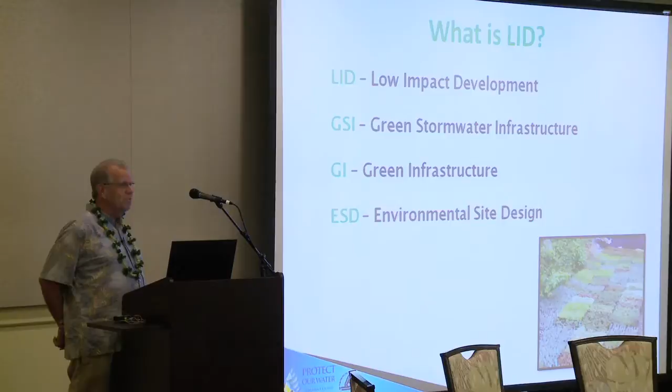If people have questions while I'm going through my presentation, don't hesitate to raise your hand and I'll try to answer them. What is LID? The initials of it are low impact development, but it goes by a lot of different names - green stormwater infrastructure, green infrastructure, environmental site design. It's all lumped together under one general topic of low impact development, LIDs.

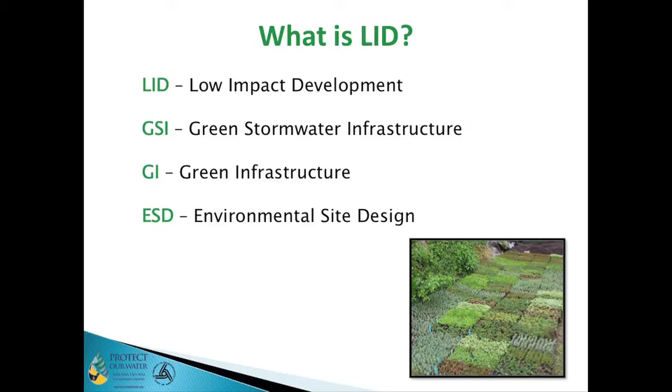Really LID is comprehensive land planning and engineering to kind of take things back or keep things at pre-development levels. In the urban setting, you've got more impervious area, you're going to have more runoff, you change the hydrologic cycle, and the whole concept is to control that runoff and keep it at pre-development levels.

Control it at its source, incorporating infiltration, retention, biofiltration. All of those concepts are to return it to the groundwater, to filter out undesirable materials, sediment, debris, what have you. The biofiltration uses vegetation to really clean up that runoff that's generated.

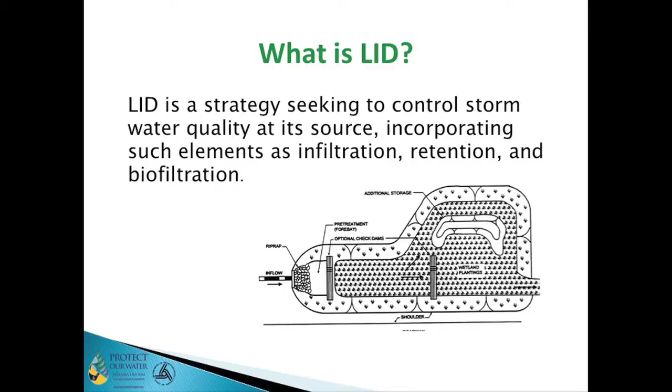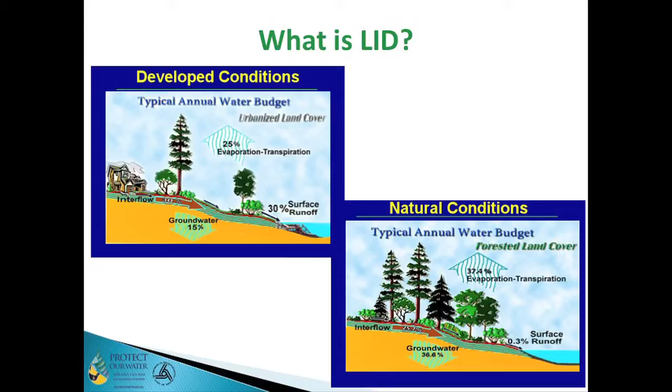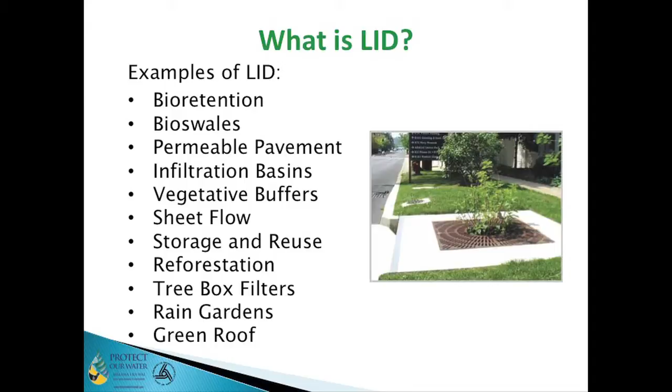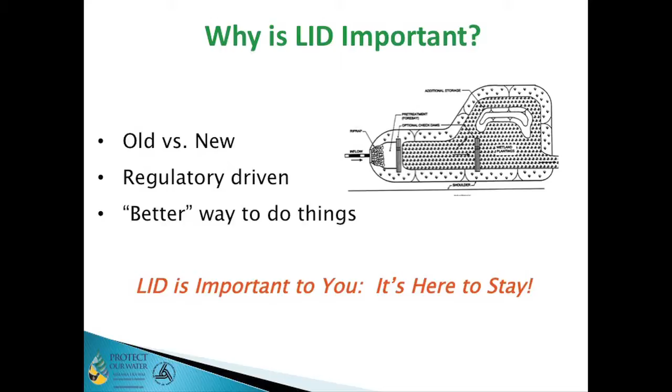Most of it is generally regulatory driven, but with LID it's a better way of doing things, it's a more natural way of doing things. It's not hard engineering - you're not out there building retention basins with overflow weirs and what have you. It's soft, soft green engineering activities.

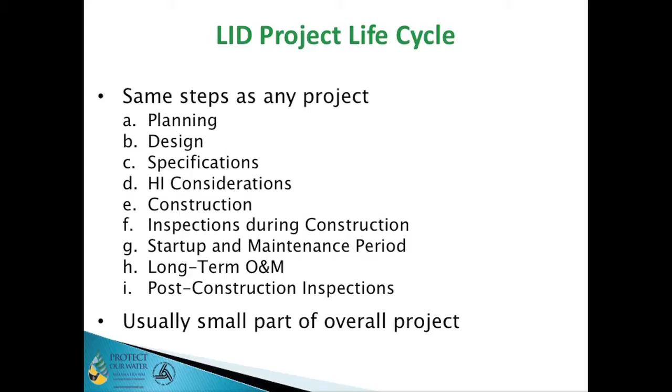Planning, I call that a three-step process. You've got to look out where you're going to do this, lay out the site, and plan for what it is. Select your LID practice - is it going to be bioswales? Is it going to be bioretention? Or one of the other aspects of LID.

Bioswales work real good. They're actually kind of like speed bumps. They work. You can use them in your ditch areas or grass waterways and so forth.

They're very, very effective. The next part in step 2 is to check on the runoff reduction, because that's the whole thing you want to do here. When you've got impervious areas, you're going to have increased runoff. You want to control that runoff, so where's it go? How effective is your particular LID at reducing that runoff amount? And then based on that, what is the size that you need to design for?

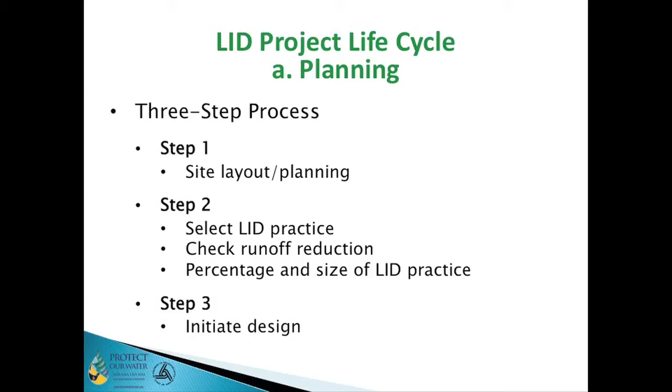There's a lot of information out there. If you do a Google search on the letters LID, you get a lot of good information from municipalities all over the country. There's a LID center on the East Coast that's been in business. I think Neil Weinstein from the LID center was here and spoke on this last year, Richard, wasn't it? But there's just a lot of good information on design procedures, hydrology considerations, and so forth. And then you initiate the design.

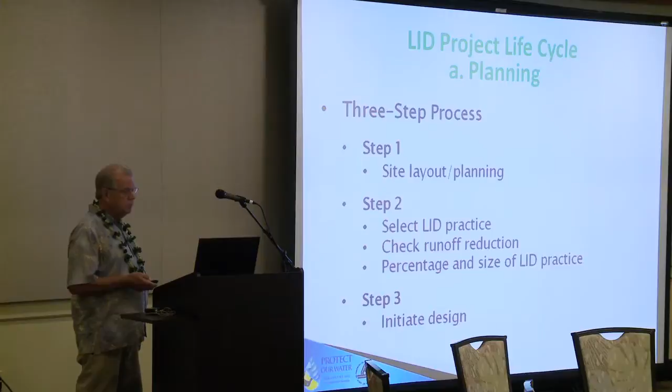The design you get into, you want to really achieve multiple objectives. If there's natural features and resources, you want to preserve those. You want to take those into account of what you're doing, what you're trying to plan around, and so forth.

One of the big considerations for LID, because of the infiltration consideration, is you want to minimize soil compaction through your design and ultimately into your construction. And keep that stormwater close to where it fell on the ground, on the land surface. You don't want to pick it up at the end of the pipe or something like that. It's much more effective to do it right there where it falls.

And the last one is to reduce and disconnect impervious areas. You don't want to have large areas of impervious material. That increases the runoff - it's more that you got to contend with. Have smaller zones of that and what have you.

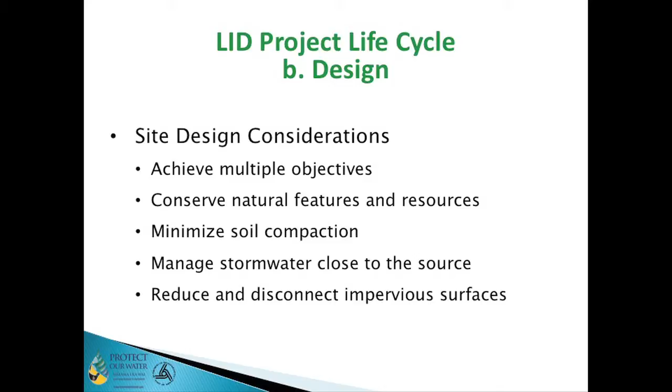Some specifications - I pulled these out of the Hawaii DOT, and I'm pretty sure this would be a pretty encompassing list of what specifications generally would apply. I've been involved with, there's different formats of specifications. Departments of Transportation usually use an AASHTO format of specifications, and this Division 100, 200 series follows that.

There's other specifications, the Construction Specification Institute CSI format. They have some of the similar sections of specifications. For the most part, these specifications can be utilized generally as is, or maybe some general information provided for what the scope of the project is, or the project summary section, the earthwork. There might just be some minor language, but you can follow the general format of those specifications.

I've been involved in projects across the country where we've utilized the highway specifications for LID construction, quite successfully. So there's the general provisions. There's always going to be earthwork, miscellaneous construction, and the materials section, because the materials section includes both granular base material, as well as for filtration, as well as the planning section.

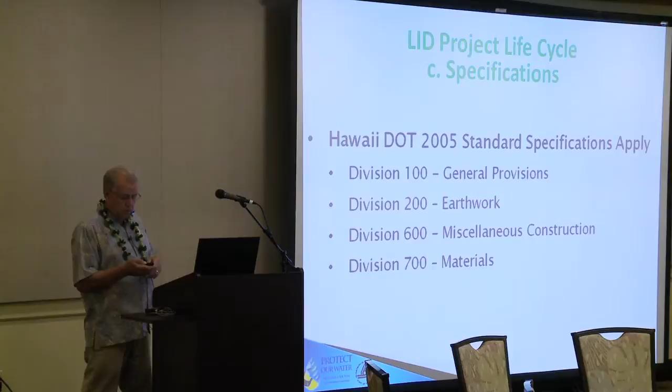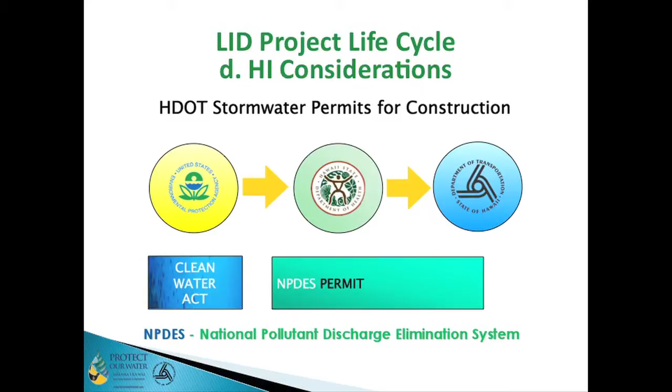Also getting into the Hawaii considerations with the stormwater permits for construction - it depends on the size of that particular LID. It may or may not apply, but it may at least apply under the general permit considerations. There's construction stormwater permits, the notice of intent, a SWPPP that's necessary, BMP installation, and so forth. Inspections and monitoring during the time that you're constructing that.

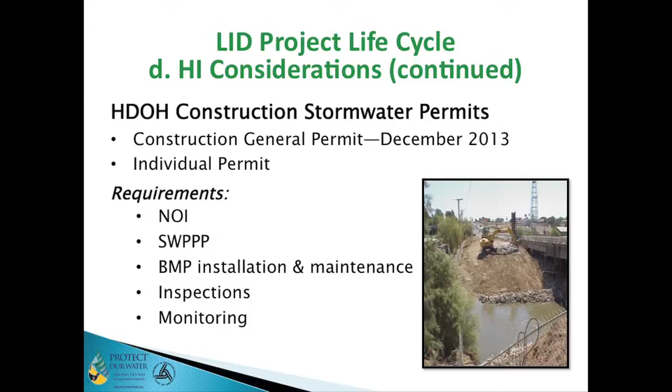The actual construction - you want to figure out where's the LID going to go, and lay it out. You want to identify and locate any BMPs that would be associated with it. Again, limiting the traffic over the LID is important. You don't want to be compacting that soil. You want it so that you can get percolation and infiltration when the LID is constructed.

Use the low ground pressure track - this means the wider tracked excavating equipment. You may have to use long reach excavators in some cases, which is just a special case of the low pressure equipment. And scarify or rip the bottom to increase the ability to infiltrate.

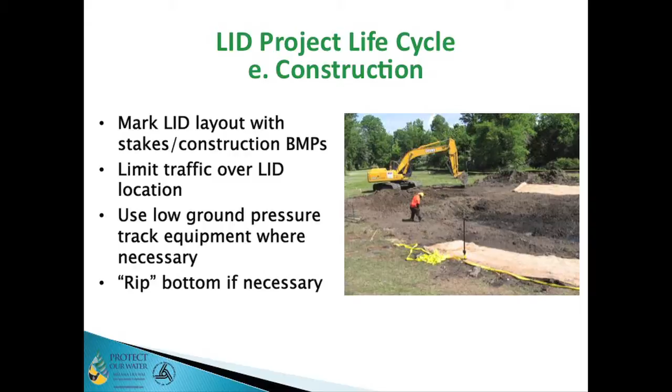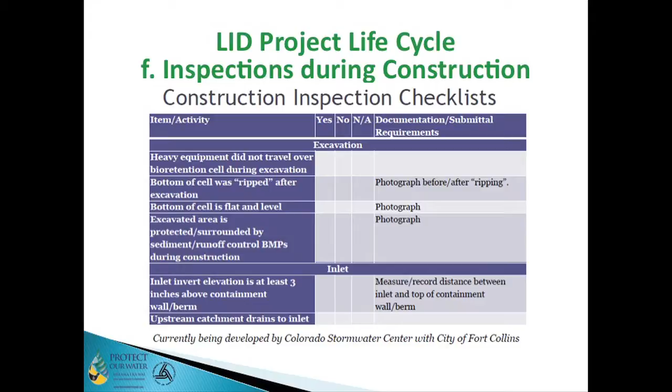Startup and maintenance. Chances are, during the time or shortly thereafter, you're going to get a rainfall event, and likely you're going to get sediment, trash, other debris that will wash into your LID. That's things you've got to deal with - you've got to provide maintenance for that, remove it, get it out of there. And as a part of your design, you would probably have some type of screen or something to accumulate that.

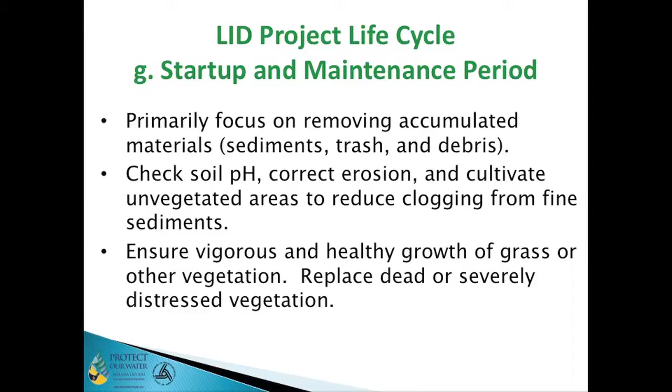The soil pH is necessary to look at for the establishment of vegetation. You want to make sure that unvegetated areas can be cultivated and replanted if necessary, because vegetation is a key to these LIDs. And like the last one there, ensure that there is vigorous and healthy growth of grass or other vegetation that is a part of the LID process.

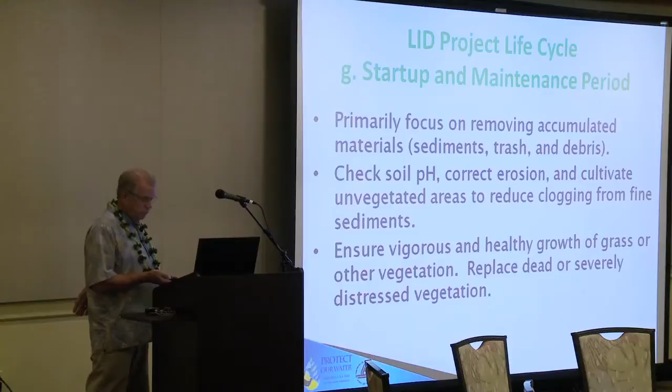Long term, that same consideration - you want to look at, you've got to deal with the sediment, trash, and debris. That is probably the biggest complaint on having LIDs in the long-term sense, because they do collect sediment, they collect trash and what have you. But at least, all of these are part of your overall general stormwater management process. You've got that as a problem anyway. And in some cases, it does become a more concentrated or identifiable area to collect them.

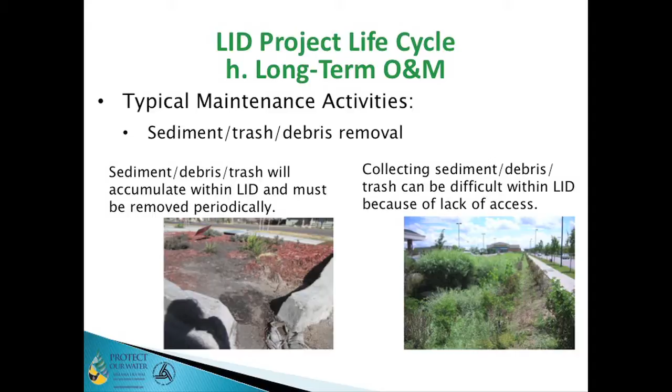But it does take maintenance to remove that material. Sediment, debris, and trash that will accumulate, you've got to remove it for the system to continue to be effective. One of the problems, if you're building these, either along the road right-of-way or in a little bit more remote or limited access areas, it can be difficult to get to them. But that's one of those things you need to kind of plan on up front and in the planning process to incorporate in your design.

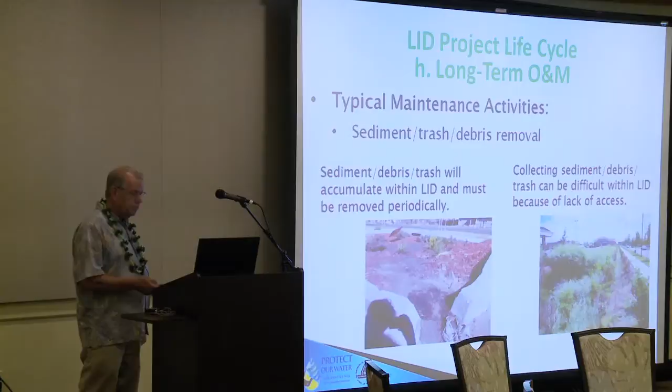Some of the maintenance problems that can occur with LIDs generally go back to they're not performed frequently enough. You let it get up to a state where you've got a problem. It's filled up with sediment. If it's filled with sediment, it's not going to retain any water, it's not going to allow infiltration, and so forth - it just plain isn't going to work. All you've got is an ugly spot out there in the countryside or along the roadway or in a parking lot, what have you.

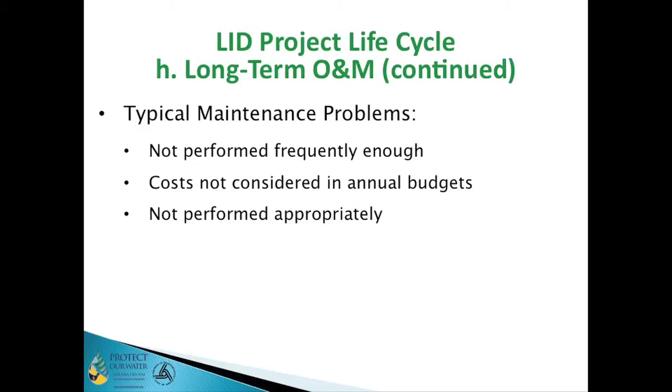Costs need to be considered in annual budgets. This is a hard one because, while LIDs may sound new, they've been around 15 years for sure - I know personally I've been involved with them for 15 years. But the costs are just kind of starting to come together. I've seen costs going back 10 years ago starting to get some costs developed. We know what standard cost for like excavation and reseeding and things like that could be from experience. But there's a lot of information, again, by doing a Google search of entities that are doing this.

With the U.S., LIDs are applied everywhere. On the mainland, I don't think there's a state that hasn't applied them. They're doing them in Alaska - I've had personal experience with using LIDs in Alaska, which gets a little bit interesting with the permafrost considerations and so forth. Here on the islands, this is actually probably a location with the ability to promote the growth of vegetation that is very good. So there's a lot of information, a lot of experience out there, and if you're starting out and looking for something to get a handle on what it could cost to maintain these, you can find that information.

And last, it just wasn't done right. I really don't know what that problem could be, because unless you get into recompacting the soils or doing something like that - if you just go back to what the original plan was for the construction of it, and that's what you maintain back to, you should be able to achieve it.

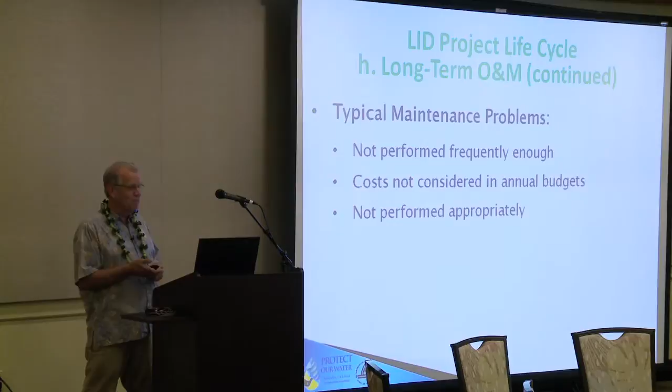Some of the post-construction considerations - again it goes back to that you want to have certain routine inspections, periodic, that are done just to make sure everything's good. Are you getting accumulation of trash, a lot of sediment, what have you? Is it looking nice? Because that's a key aspect of it. It can be a very aesthetic system if it's operated correctly. It could also look pretty trashy and junky if you don't, and select the wrong type of vegetation and so forth.

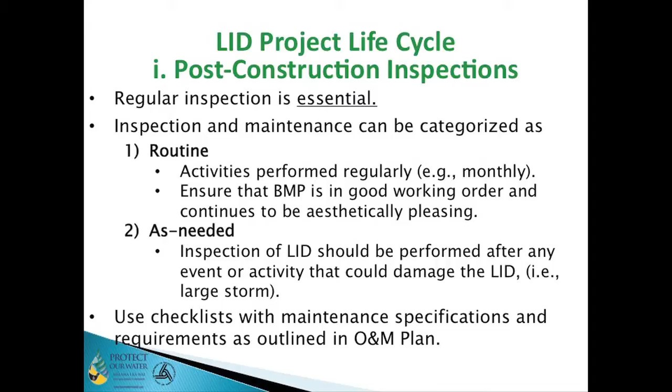Then you get into the as-needed maintenance. If you get a major stormwater or runoff event, these systems are not designed for the 25, 50, 100 year, or I don't even want to think a 500-year event, because they probably won't survive. And that's okay, because they're not intended to do that. They're not a flood control project, they're a stormwater project. They're for those more routine runoff events to control sediment and debris and promote infiltration. But when you have that large runoff event, they need to be inspected and any appropriate maintenance done at that time.

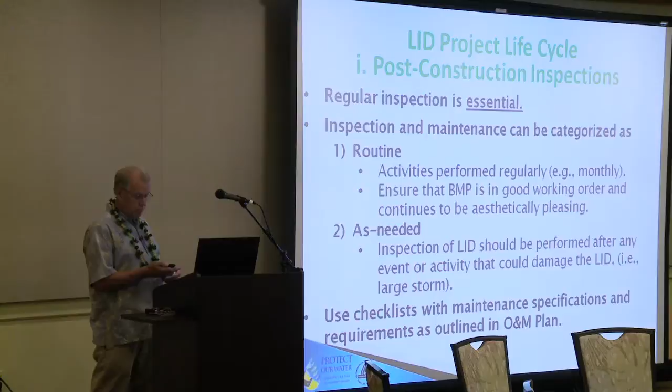Some other resources and take-homes from this: learn what you know and know when you don't know it, so you can ask questions. And again, there's a lot of people out there that can provide insight and support to assist in the design, the construction, the operation, and so forth for LIDs.

Here in the state, we've got a construction BMP manual, a maintenance BMP manual, and the permanent BMP manual that are available out there to assist in this aspect.

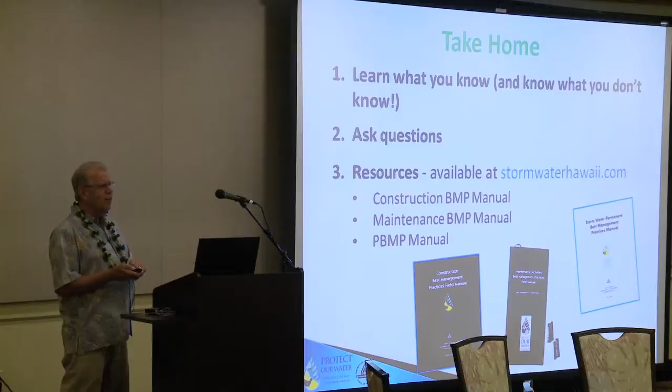There's a lot of things to consider, but it's also kind of straightforward. It makes common sense - it's collect and store that runoff at the point of application, where it falls on the landscape, and there's a lot of different ways that you can make that happen.